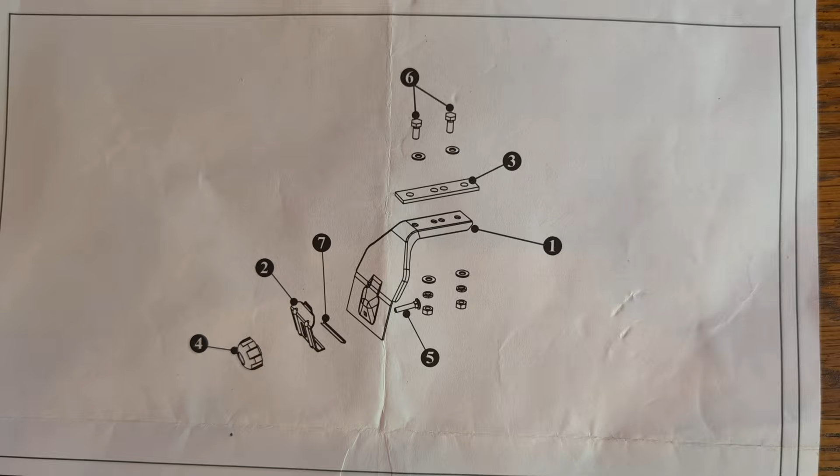When I got these brackets, you can see the bracket there. It's got those 4 holes in the top for attaching it. I'll show you an exploded version too, from their instructions, and you can see all the parts here. That's the bracket, and this is the outside of the bracket that clamps on with this knob and this bolt.

What that does is clamp. There's the knob with the first part of the clamp, and it clamps to the second part of this bracket. When you torque it down - I drove it all the way to the Van Nationals out in Ohio from Maine, about 12 hours each way, rock solid, no problems at all, never came loose.

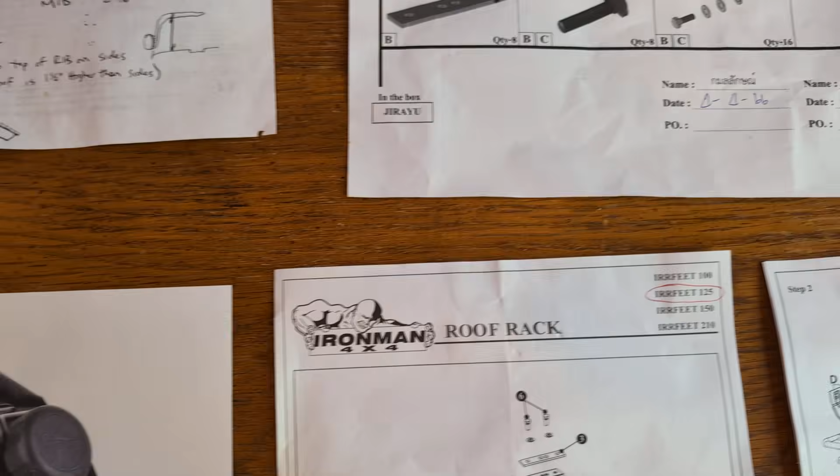This particular bracket is universal, but these brackets are intended for a rack like on a Land Rover or something, flipped upside down with them attaching the brackets. These are universal, and I got them to put on my van and custom build this deck.

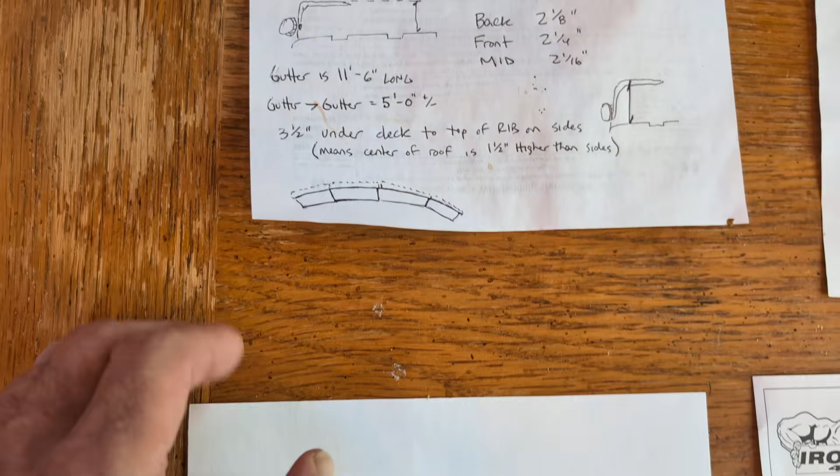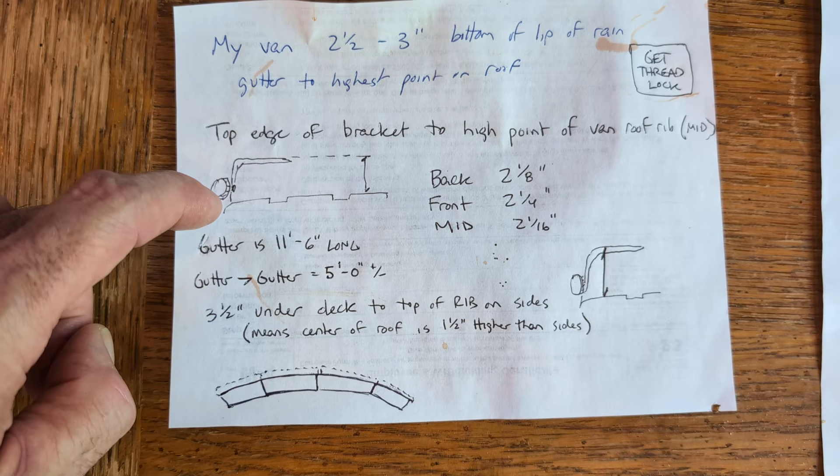So when I got this bracket, I was pretty sure I had enough space for my cross piece, my stringers. I measured, and you can see here when I set them up in place, the brackets without anything, I set a level across them across the roof. They're about 3 and a half inches on the side from the gutter to the top of the bracket.

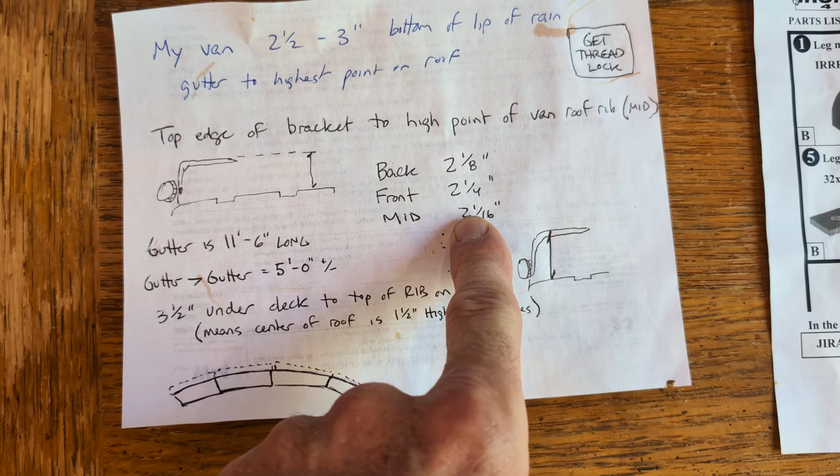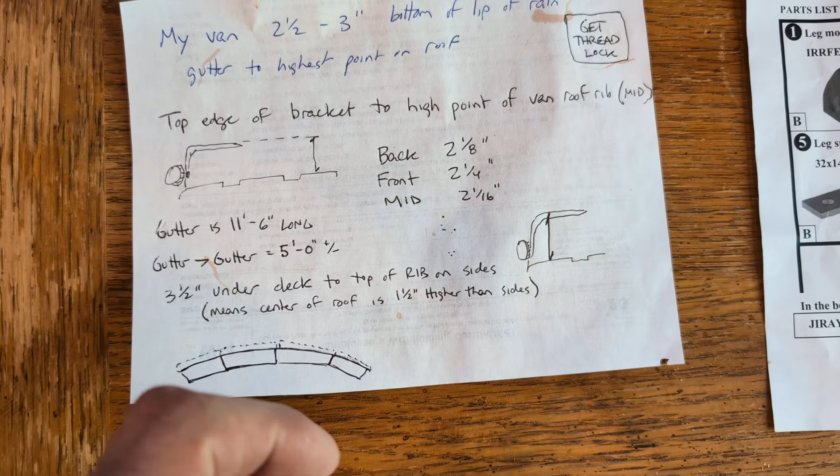But the van roof has a curve both side to side and front to back. So from side to side it wound up being right around 2 inches underneath the bracket in the middle of the van. So if it's 3 and a half inches down here in the gutter, it goes down to about 2 inches of space between the top of the bracket and the top rib of the van. That's a picture of the ribs on my van roof and this bracket and that distance there.

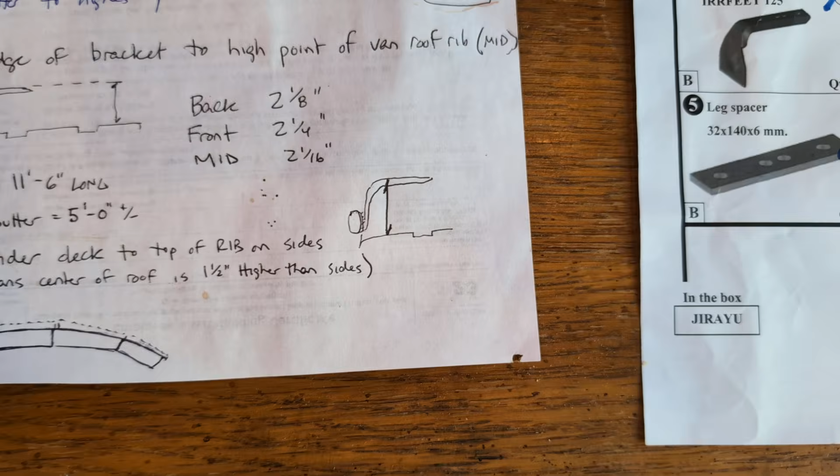So there's a greater distance on the edges, but what you need is enough space to clear the top of the van. I'm going to go back out now - I think that's enough to see there. But again, those are the brackets.

I'll show you where I bolted. I bolted from the bottom up through my stringer and up through those holes. I put the nuts on and some lock washers, then cut them flush to the top of the nut, and spray painted them black. Then I countersunk underneath the decking to set the decking down over those so they disappear.

So let's go back out and it'll make a little more sense now. I'm going to take off one of those knobs just to show you how these work. So it simply comes off, and that's that part of the bracket, and it attaches with that bolt.

It has a little rubber foot on it so it doesn't scrape up your paint. When I put this on and torqued these down, I drove 800 miles each way, and this entire thing never moved, never shifted, those never loosened up.

I'm gonna go up on top of the deck. To access it, I bought one of these telescoping ladders from Vevor, V-E-V-O-R. I love their stuff, inexpensive but quality. It shrinks down to only as high as the first 2 rungs, so I can stick it in the van underneath my bed. I'll show you real quick, I got a full queen size bed in here. I have another video on that.